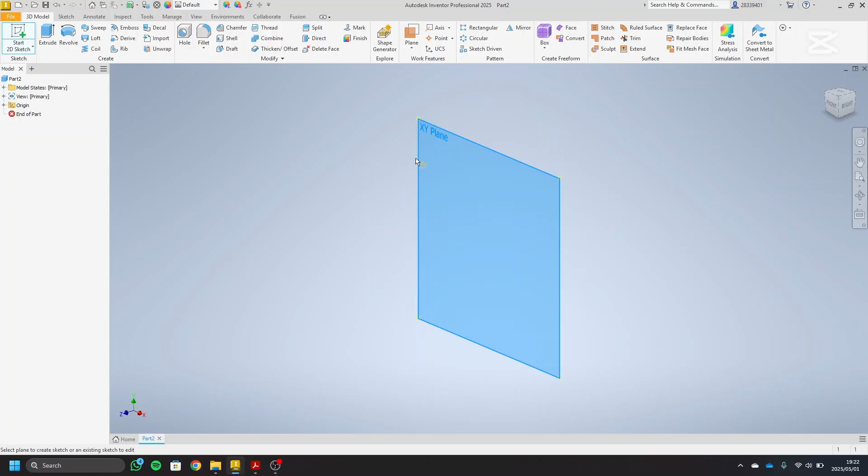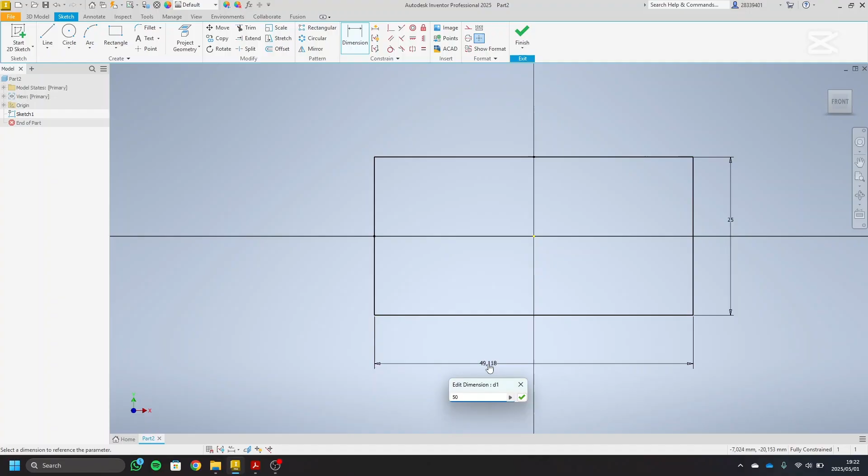And then you can dimension. So this was 25 and this was 50. And then we can extrude this in both directions as 50.

Now instead of going to the front view, because this is the front view, I went to the side view and I did some sort of procedure to get this height over here, which I will show you now.

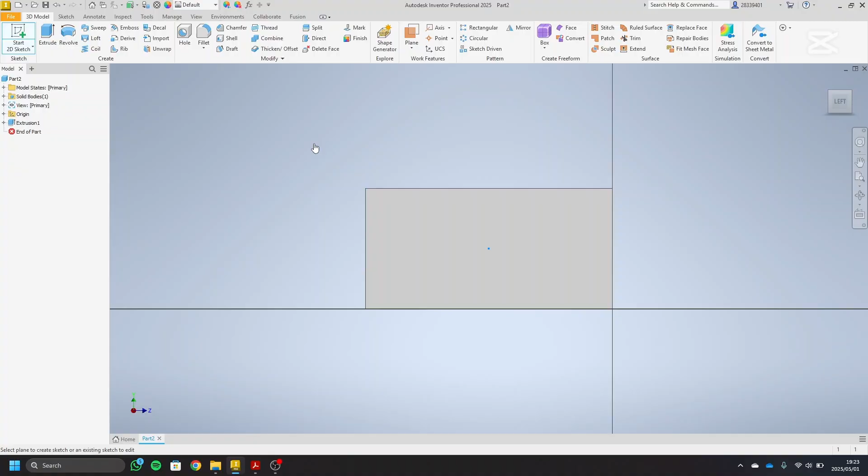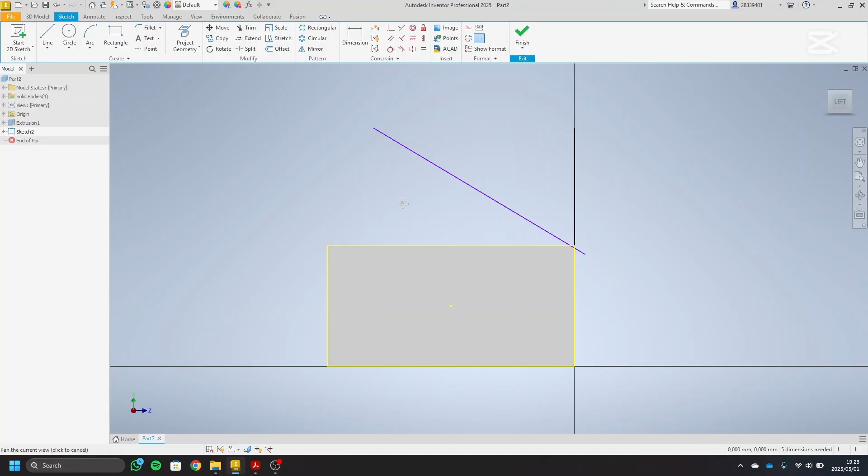So we create on the left view. I created a line going straight up at any distance, and then from just below that point I created another line like that, and then I just made sure that this end of this line was there.

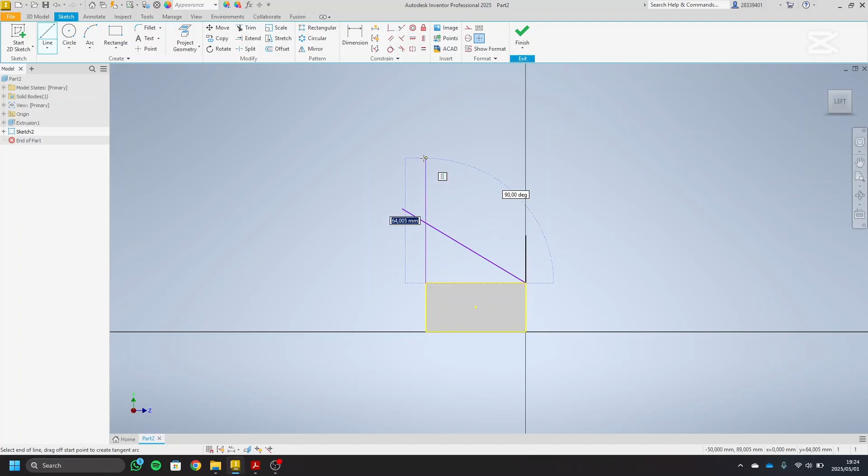I just extend that line a little bit, and then you make another line going straight from here going up as well. So now you have these two lines, this line that you can dimension from this over here as 70, and this is that angle that we're looking for.

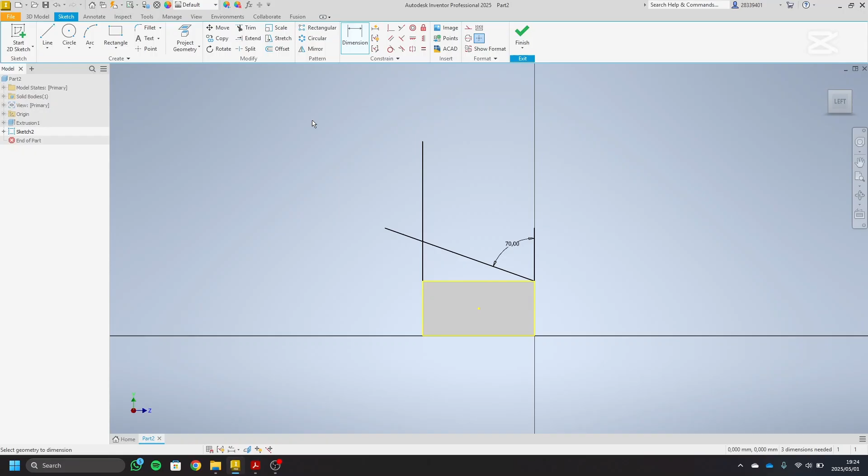So we will extrude whatever is within this little triangle that we have over there. So we can extrude this like that, and now we have this part like that. So this is the front view and that is the side view.

The next thing we need to do is get rid of this piece over here, but before we do that I'm going to extrude everything in this cutout, and I'll do the same on this side. Here we know that this is a distance of 25 and this has a height of 5, so we can just extrude that, create another sketch on here,

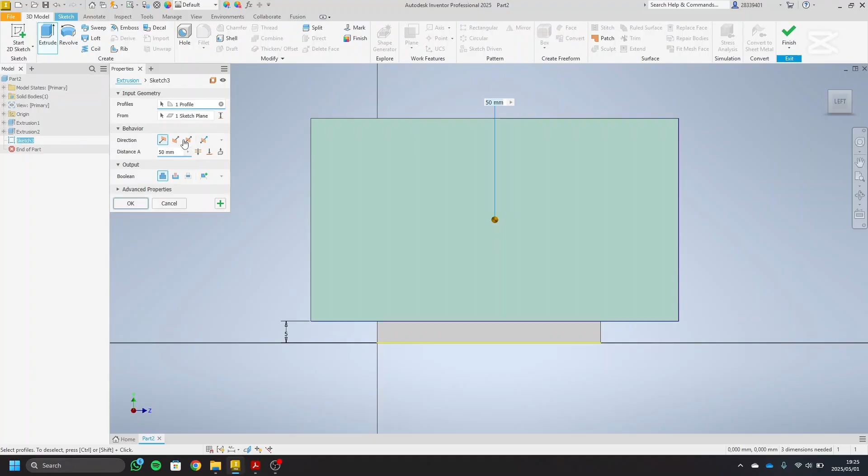and then we'll just create whatever like that, and then just dimension the bottom to this bottom as 5, and then you can just extrude this whole thing a distance, well, cut a distance of 25, and you're left with that.

So that part of, if you look at the front view, then this part is created. So we can do the same thing on the back view. We also know that this thickness is 5 and it's not a straight triangle, it's like a bar or a slab that runs up at an angle like that.

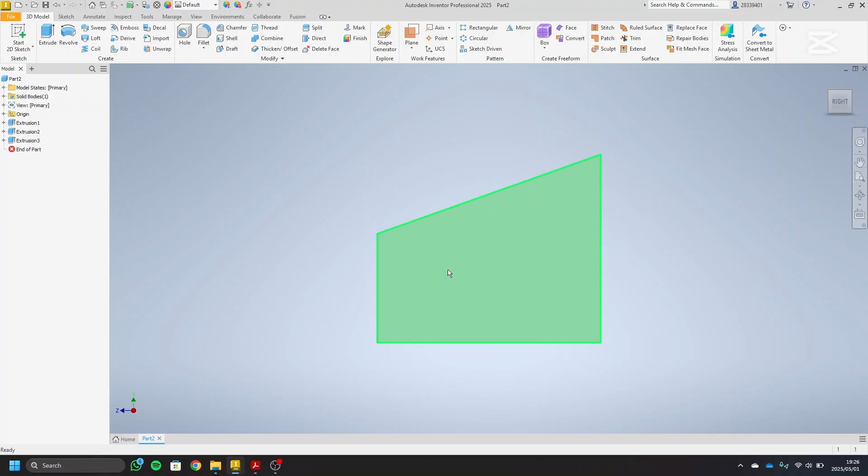So if we go back here and we go to this side, we can do more or less the same procedure. Let's just create a line like that. What you can do is instead of dimensioning this, just project geometry and then make this line parallel to that one.

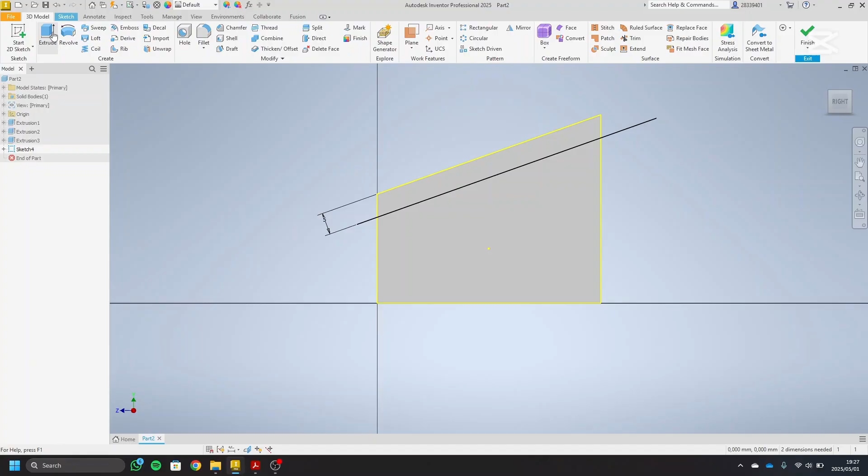Alright, now that it's parallel, you can give this a thickness of 5. There we go. And then we can extrude this, well, cut it a distance of 20. This area will cut in the back a distance of 20.

And then if we look at the front view, we're left with this part that we are looking for. So now we need to get rid of that extra bit of material that we have over there. So the way we do that is we use this auxiliary view, and if we go and create a new

sketch on this piece like that, we can take a point, because we're given this entire distance over here, we know it's 50 millimeters, so we just take a point and place it along there. We take a point anywhere here and then dimension this point on this side as 50,

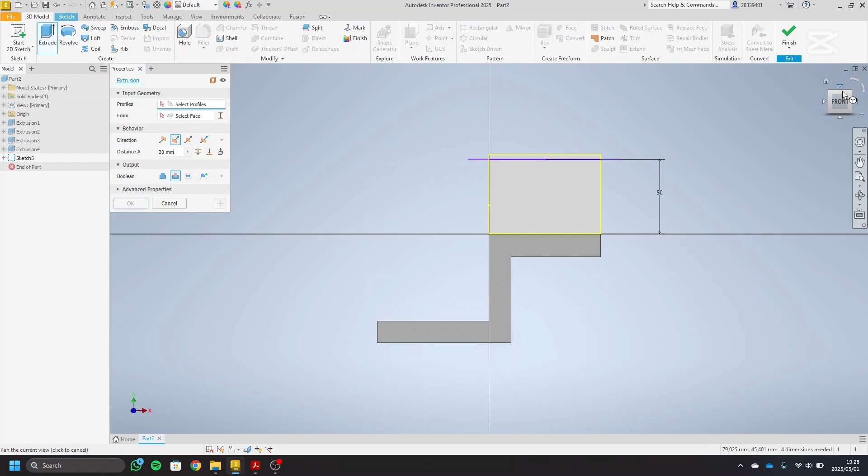and then we just take a line like that, and you can extrude all of this, or well, cut it away. You can remove all of that material. And then you are left with this over here. That is the part that you want to create.

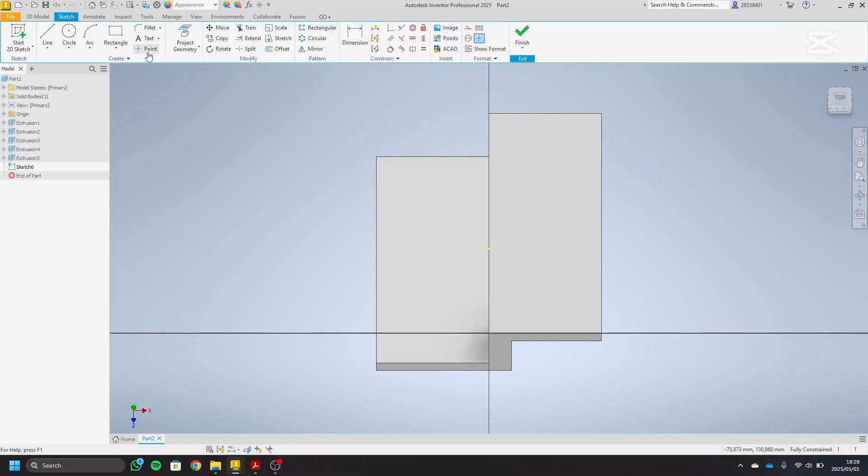So we just repeat this step now to create the slot and the hole that goes through. The hole is 10 millimeters diameter, and this slot is 5. So let's take a point and we'll place it over here. We know that this is 15 millimeters from here, and it is 12 millimeters from here.

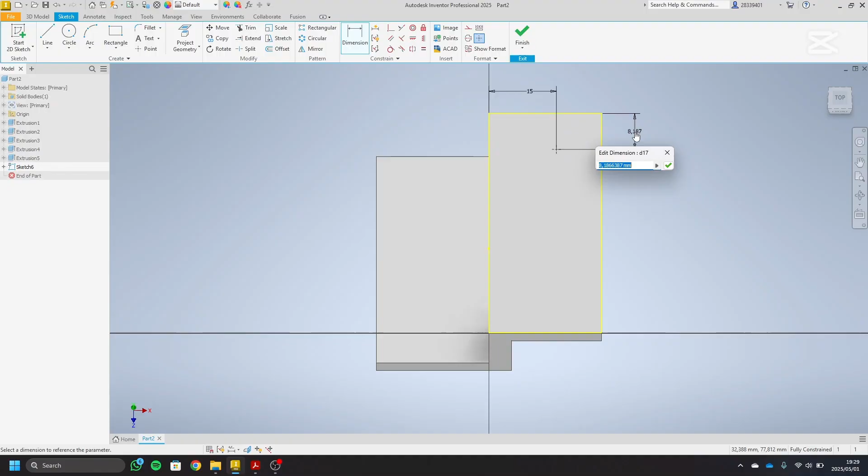Then we can create this hole of diameter 10, and then we can create another point in line with this one, and we can dimension that as 20, as given over here.

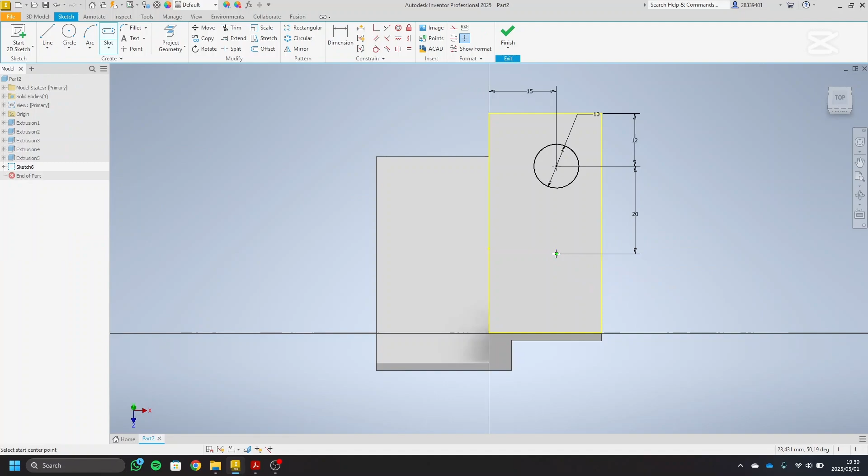And then you can use the slot feature, which is this one over here, on these points, and then you can dimension this radius as 5. Oh, the width is 5, not the radius.

So let's just go back. You can dimension this width as 5. There we go. And then you just trim this up.

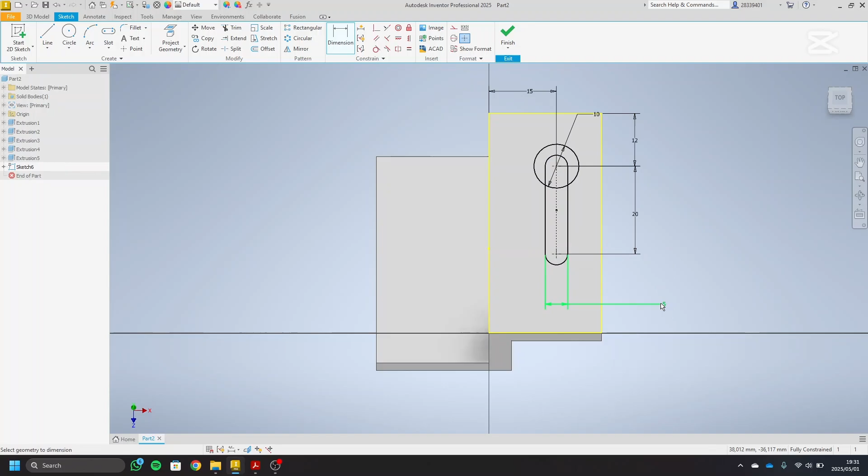And then you can extrude this, and there you have that feature created as well.

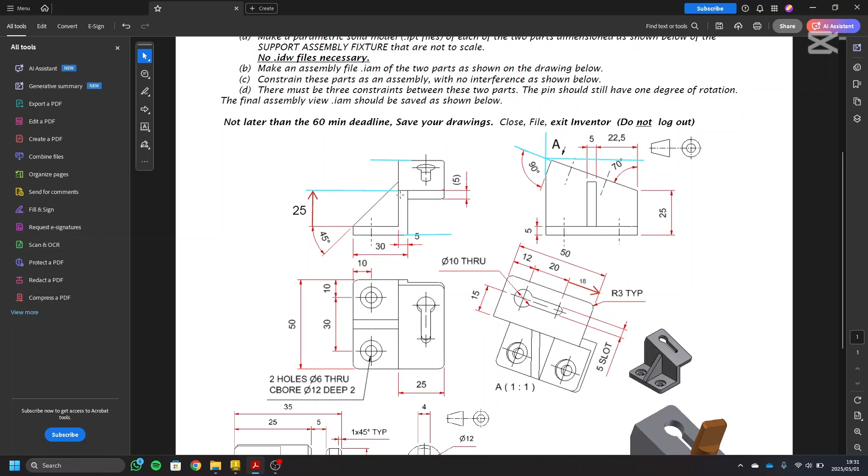The last few things we need to do are the counterbore holes and the rib feature. So the counterbore holes we can do quickly. We know it's 10 and 10, the center is 10 and 10, so let's just do that quickly.

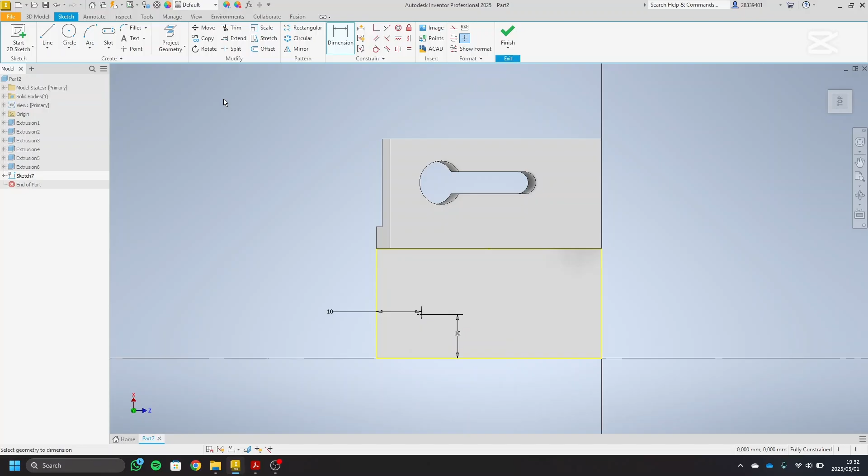Take a point and place it anywhere. This distance is 10, and this distance is 10 as well. And then we can do a counterbore hole, and it's 2 holes, diameter 6, then diameter 12 and 2 deep. So this is diameter 12, this is diameter 6 and 2 millimeters deep, just like that.

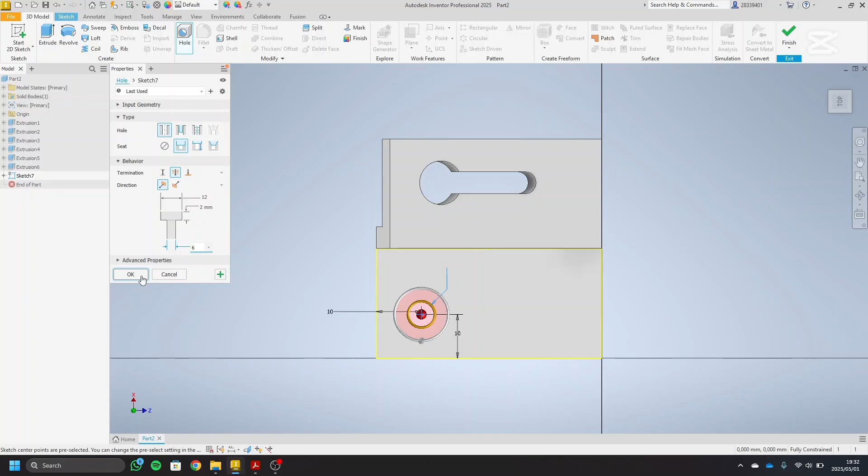And then we can mirror this. Just add this plane in over here, make it visible, and then I will mirror this feature over this plane. There we go, and so now we have both counterbore holes in.

The last two things we need to do are the fillets and the rib feature. So the fillets, what do they tell us? Okay, radius of 3. So go here, fillet with radius 3, it's on these edges.

I think those are the only edges, yeah. So just 1, 2, 3, and 4.

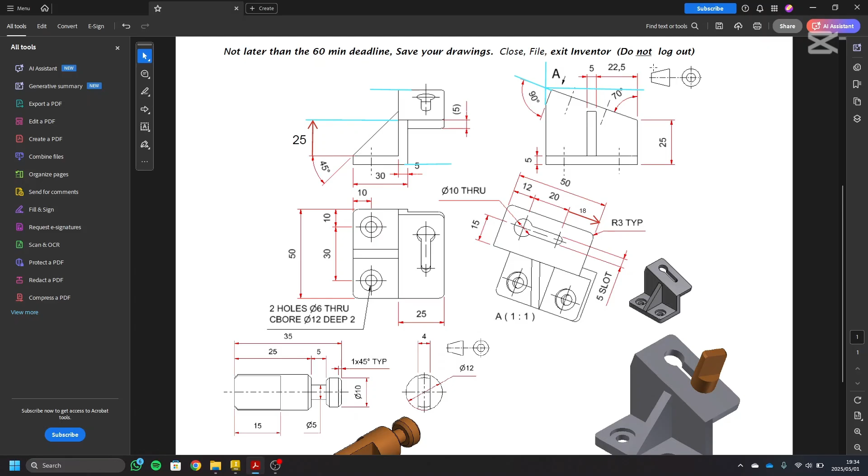Okay, and then now we need to create the rib. So we're going to click on this, and we'll just drag that a distance of 22.5, which I think I got there. Okay.

Now what we can do is we can project geometry on this edge, and this surface over here.

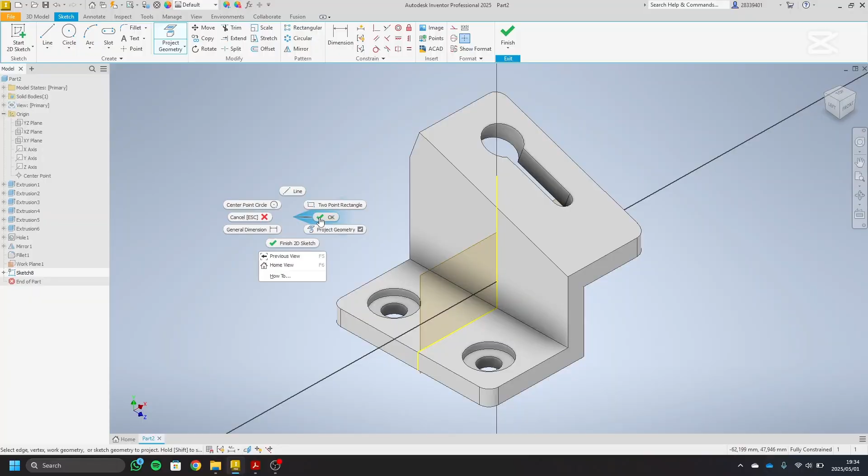And then we're just going to create a line from this edge going up a certain distance. We'll dimension this as 45 as given to us here.

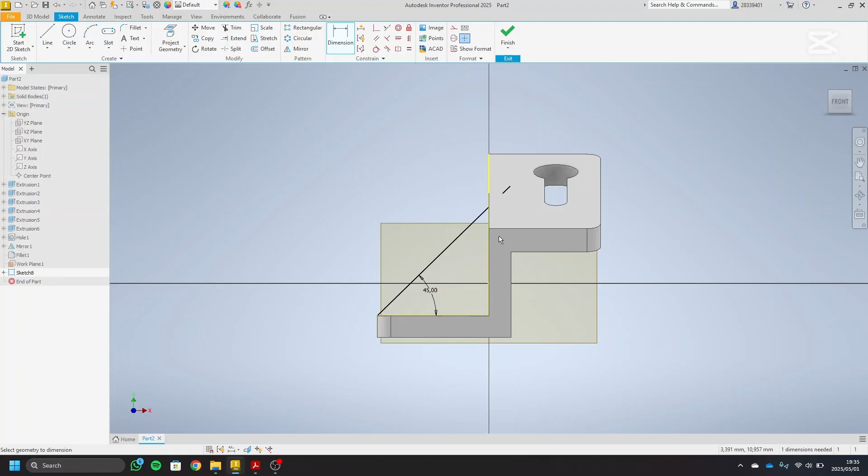There we go. I'm just going to slice these graphics quickly, and then I'm going to trim this away, and then we can create the rib from here.

So it's not in both directions because we have our plane. As you can see, we have this distance over here, so we'll just extrude it 5 millimeters to the back of the plane that we created. So this is a thickness of 5 millimeters.

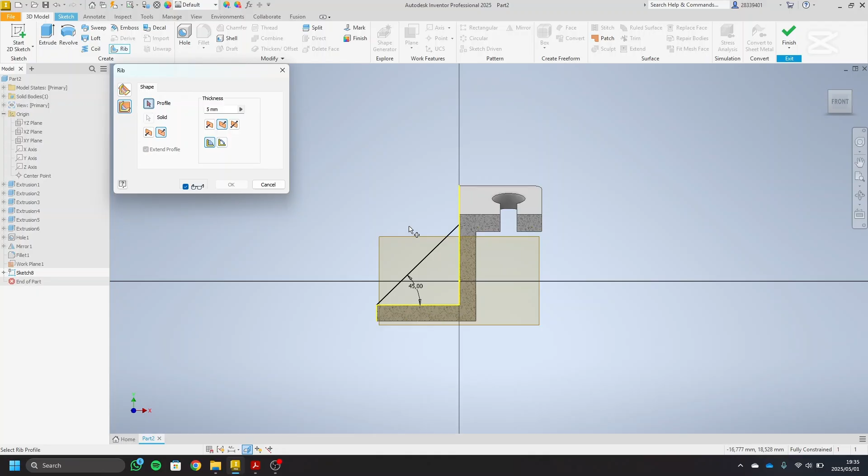To the back, and it should be exactly like that. There we go. Then we can just hide this plane, and that is the first part created.

Okay, now we need to create this little key piece over here. So let's start off by creating this diameter and then extruding the entire length over here, then the small little piece, and then that length over there.

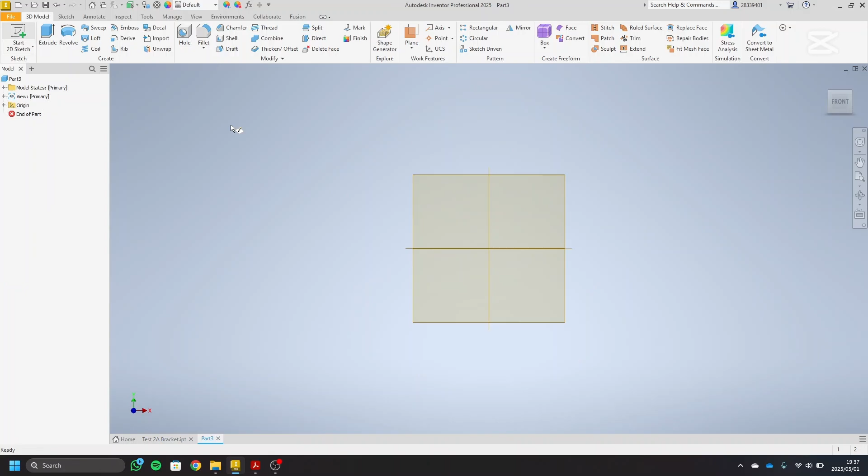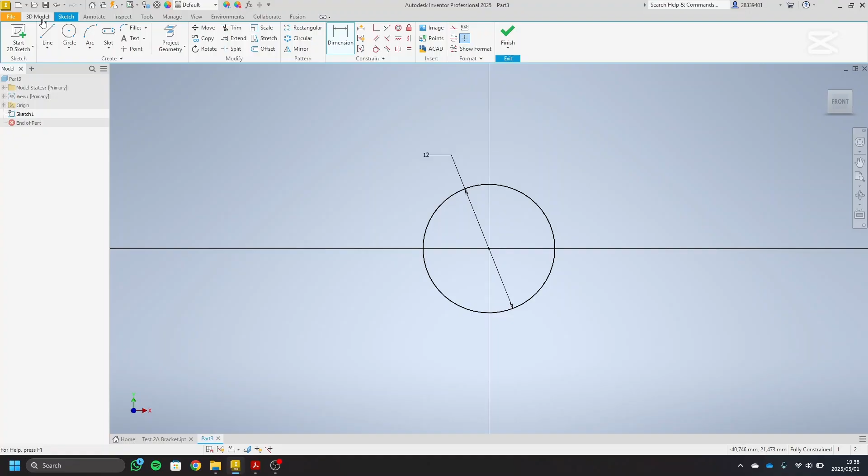So if we create a new feature, we can start off by creating a circle with a diameter of 12. And we can extrude this a distance, actually extrude everything to the back, a distance of 25.

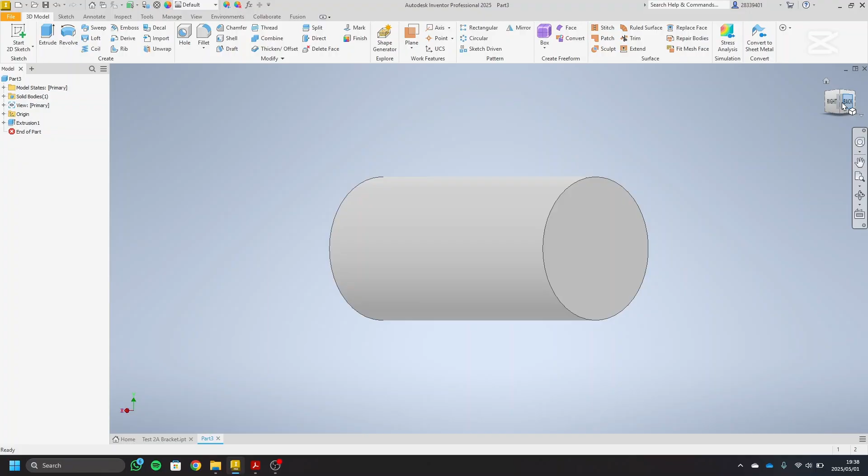Like that. And then if we just go to the back, we can create a new sketch over here, and this was diameter 5 with a thickness of 5. So we can make a circle over here. This is diameter 5. Extrude this a thickness of 5.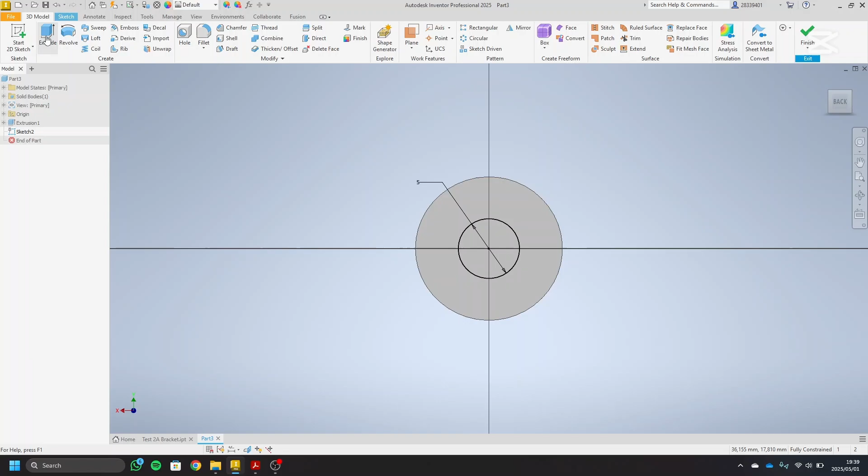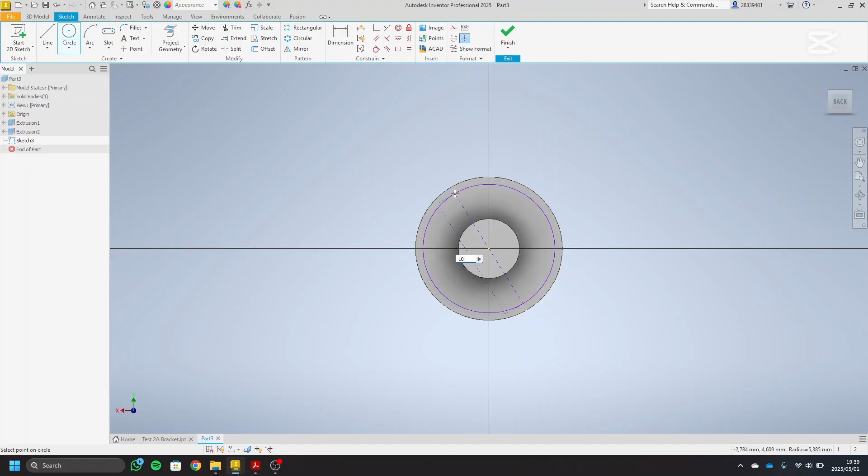And then the last one was diameter 10 with a thickness of 5 as well. So there's the basic model that we need.

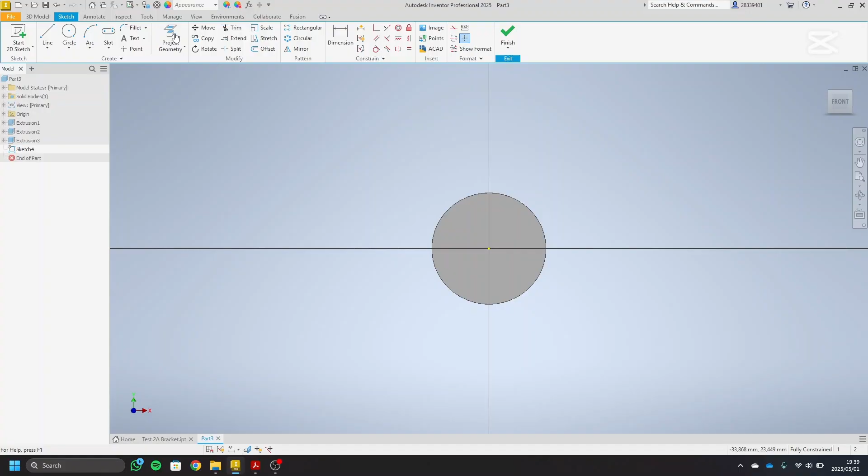Before we do anything else, on the front of this we need to create a sketch over there. And then we just need to add in, just add something like that. Make sure that this point is in line with this one. And then dimension this as 4, as given over here.

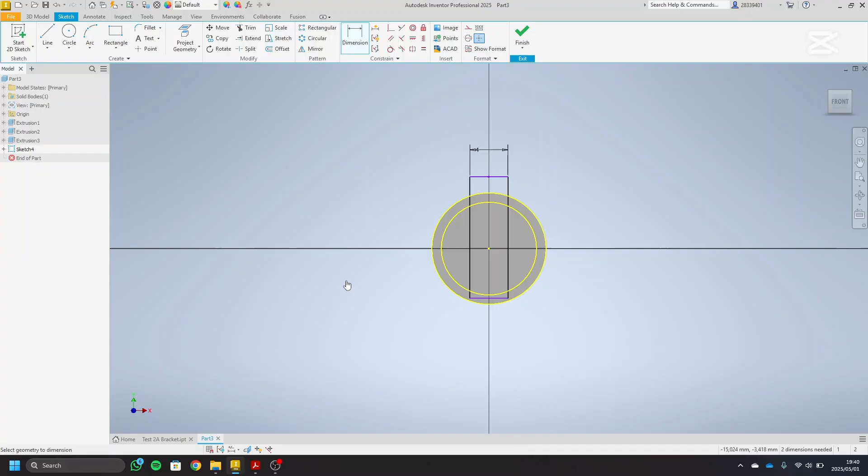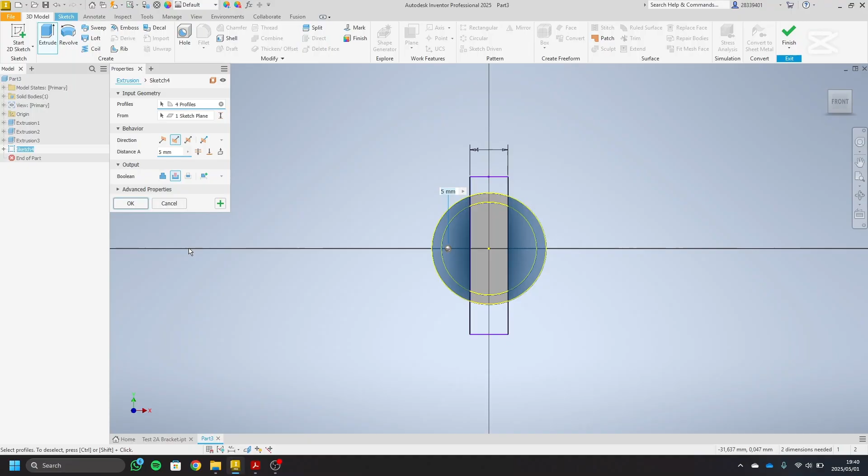Then just extend this down. And you can extrude all of this over here. This is a cut of 5 millimeters. And so then you have that part over there.

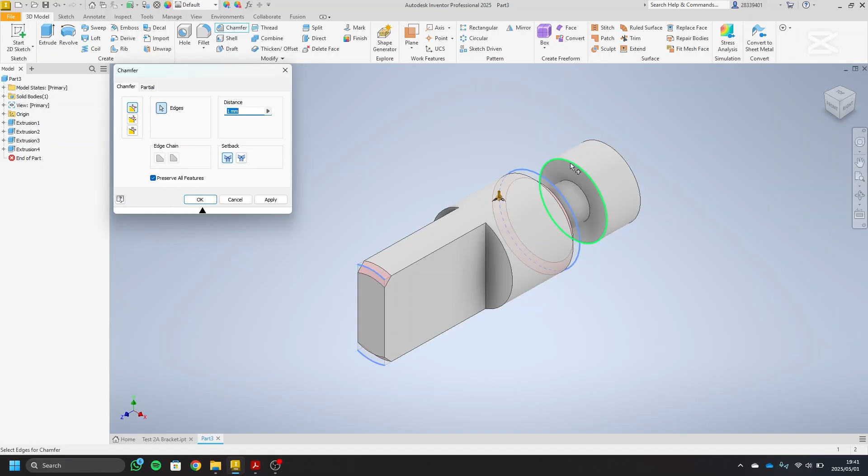Then we need to create the chamfers. So it was 1 by 45, so it's 1, 2, 3, 4 on every edge. So if we create a chamfer of 1 millimeter, it's 1, 2, 3, 4, and that is the key part of the model created.

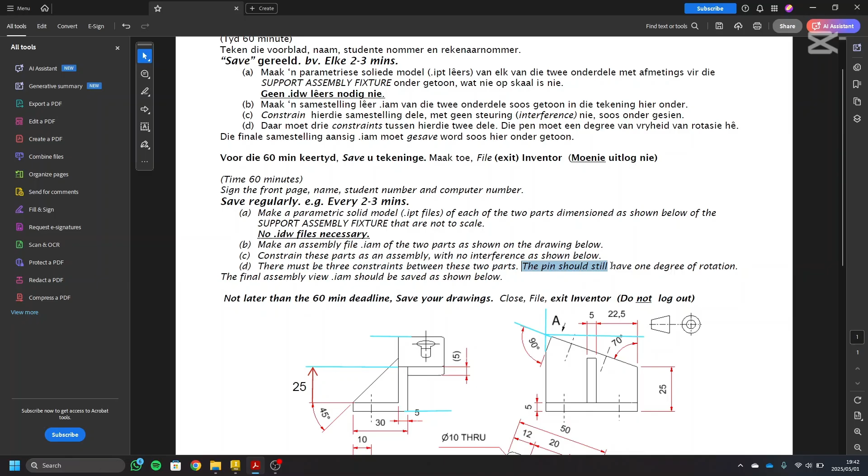Okay, now we need to create the assembly for this model. Since we have the IPT parts, they tell us here that there must be 3 constraints between the 2 parts. The pin should still have 1 degree of freedom of rotation. So the degree of rotation would basically mean this is able to rotate in here. However, it mustn't slide up and down, nor should it be able to move through the bracket itself.

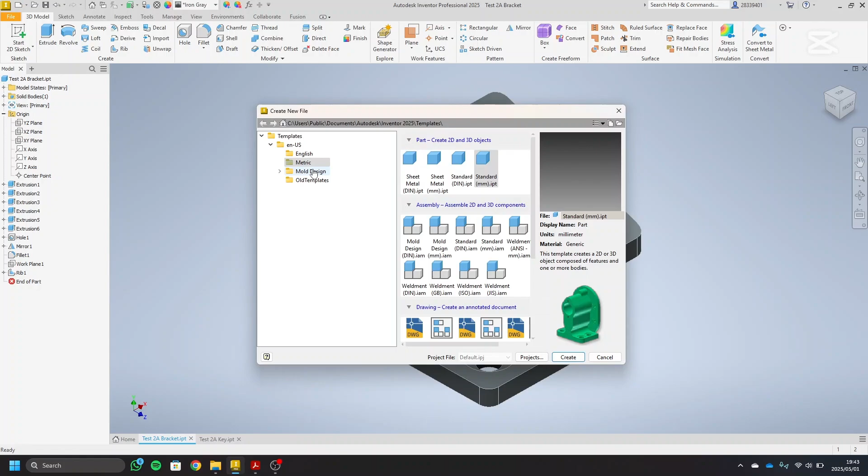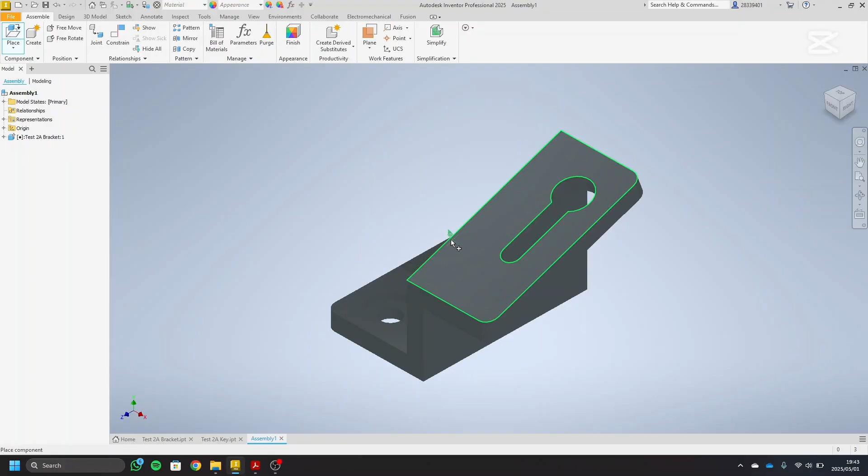So if we go ahead and create an IAM, then we can place this bracket as our grounded, in the grounded position. Okay, and then we can place the key as well. I'm just going to rotate this to that side.

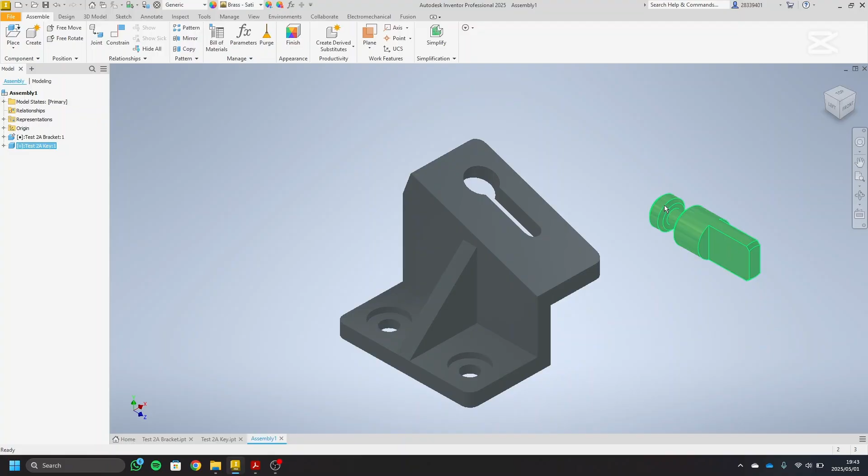Alright, that's better. So now all we have to do is we can constrain this to this section over here, like that. Okay.

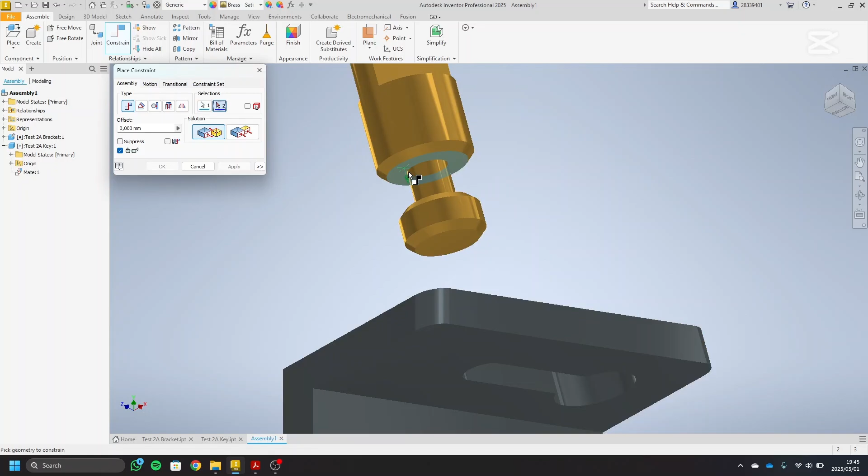And then we can constrain this piece to that piece over there, and so it should have 1 rotation. It shouldn't be able to move anywhere else, nor should it be able to move up and down. So that is the 1 degree of rotation.

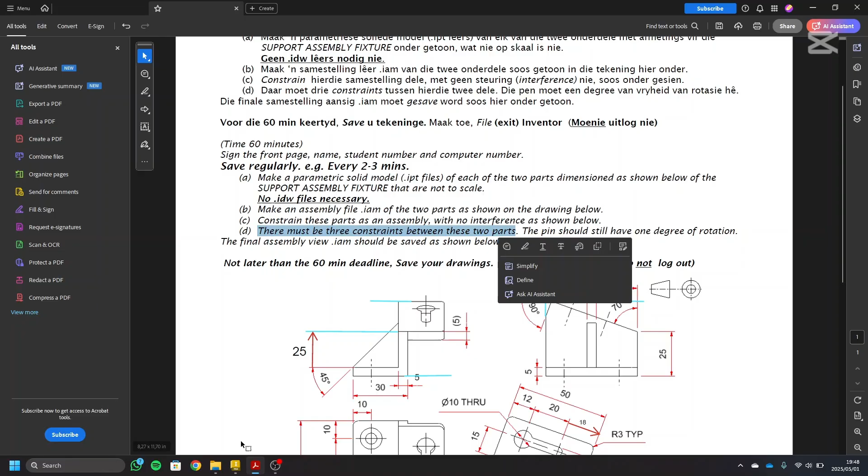There must be 3 constraints between the 2 parts. I only have 2 constraints, which I'm not sure exactly what the others would be. It's this one and this one, but I only have 1 degree of freedom over here. So I'm not exactly sure what the other constraint would be, but this is how you would create this part.